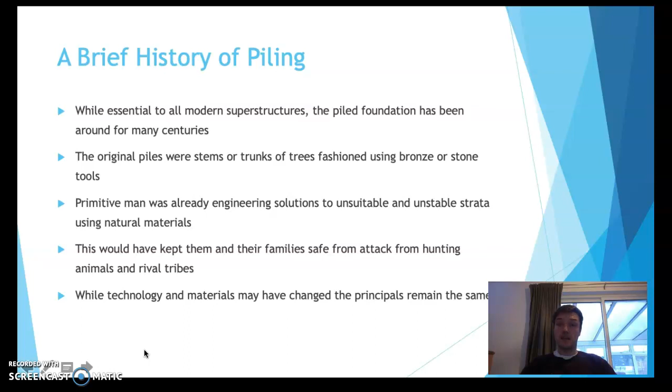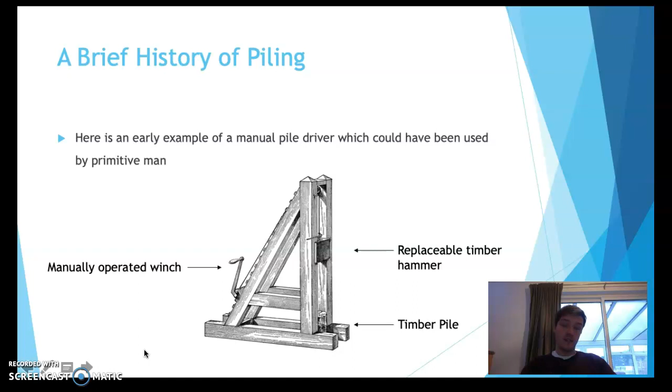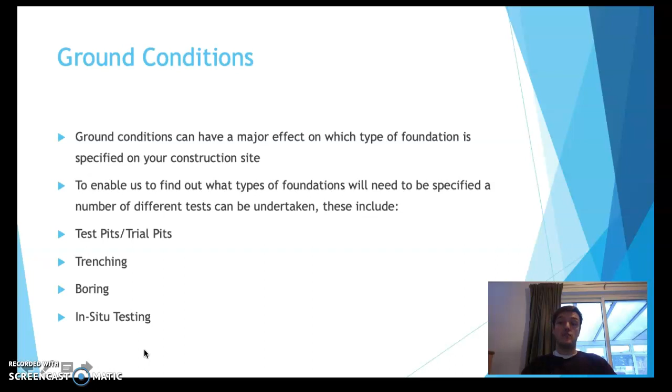Ground conditions will have a major effect on which type of foundation is specified in your construction site, but to enable us to find out what types of foundations will need to be specified, a number of different tests can be undertaken. These include test pits, trenching, boring, and in situ testing.

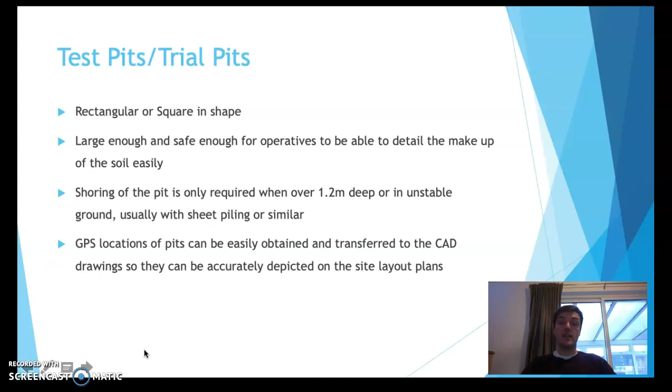Test pits are usually rectangular or square in shape, and large enough and safe enough for the operatives to be able to detail the makeup of the soil from within. Shoring of the pit is only required when the pit reaches a depth of over 1.2 metres or it's in unstable ground, and this is usually done with sheet piling. GPS locations of pits can easily be obtained and transferred to the CAD drawings so they can be accurately depicted on the site layout plans.

Trenching is similar to trial pits, except in trenching the pit is elongated over a longer distance. Elongating the trench allows the engineers to establish how the subsurface conditions can change over various parts of the site in one go. The same principles are applied as the trial pits. Each trench is to be numbered and recorded on site and on a plan so the engineers can establish which areas the data was recorded. Once the engineers have processed the information taken from the trial pits and trenches, they are able to specify the appropriate foundation types.

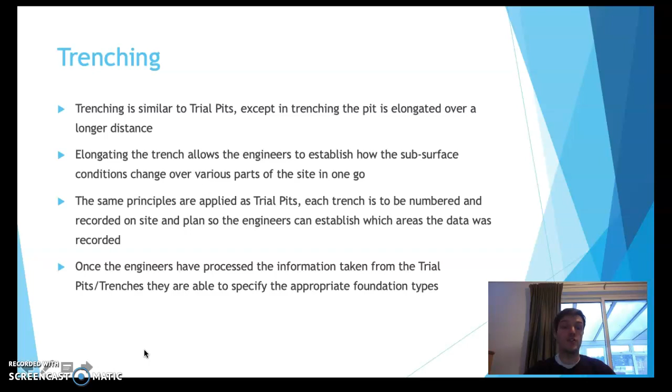Boring provides the opportunity for the engineers to physically remove the soil or rock and take them away for testing, thus enabling them to inspect the soil without major disruption and excavation to the site. With boring, there are many different things that need to be recorded, such as drilling method, drill bit type, run lengths and intervals. Should any of these items not be properly recorded, it could have an effect on the results of the geotechnical investigation. Boring also allows the engineers to establish the water table with greater ease than trial pits, trenching or in situ testing.

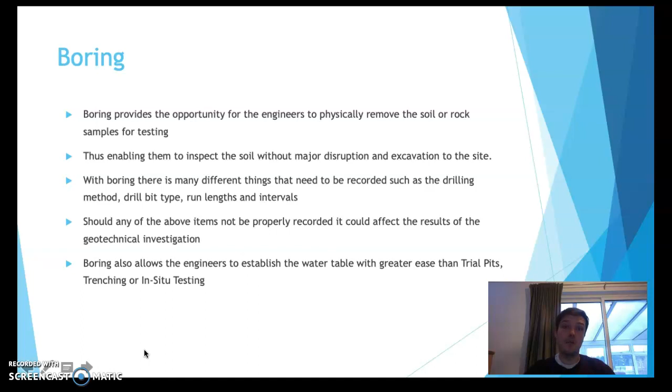In situ testing methods include standard penetration tests, which penetrate via drilling, and cone penetration tests, which penetrate via direct push. These tests can go some way into showing the engineer the relative density of the soil by repeatedly hitting a piece of apparatus with the same amount of force each time. After each blow, the engineer would measure the distance that the apparatus disappears. If the apparatus disappears rapidly, then the makeup of the soil is not very dense.

And likewise, if the apparatus takes a large amount of blows to disappear, then it's very dense.

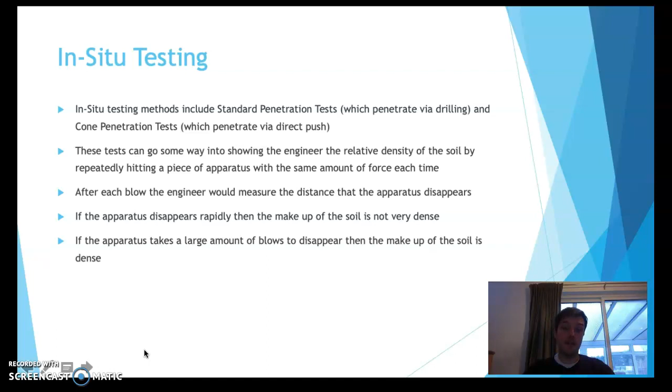Moving on to cast in situ concrete piles. These are prepared by using rig machines on site to core the ground to the desired depths and then mass fill with concrete. Without the use of piling rigs, cast in situ concrete piles would not be able to be specified, as we would not be able to excavate to the required depths. This is another way in which man has used technology to ensure that the best and fastest processes are used on site to get the best end results.

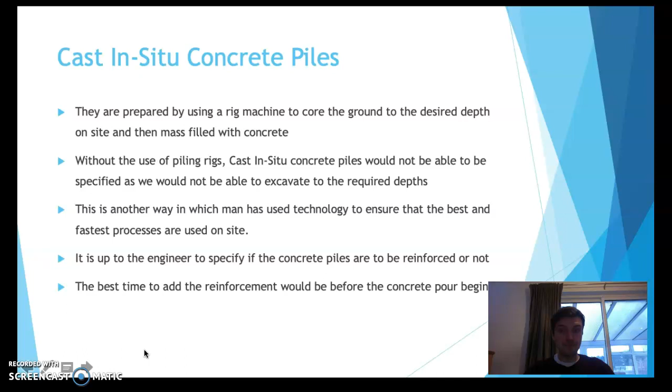It's up to the engineer to specify if the concrete piles are to be reinforced or not. The best time to add this reinforcement would be before the mass pour begins. Inclusion of foreign material within the pile can negatively impact the structural integrity of the pile. One way that foreign material can be included in the pile is via a wall slip, which could create gaps over the length of the pile. We could also reduce the risk of foreign material entering the pile by either fully lining the core or by lining the first 2 to 5 metres of excavations, should this be where the unstable soil is.

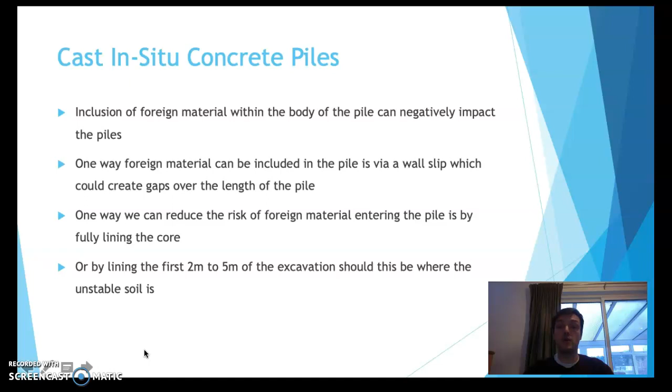Here are some advantages of cast in situ concrete piles. Custom piles of any size or length can be constructed on site. Damage during transportation of precast concrete piles is common, and this eliminates the risk. The lack of vibration from installation plant means that any adjoining structures are safe from damage. They are more suitable to sites where the soil has poor drainage properties, as the process does not significantly impact the soil immediately surrounding the pile.

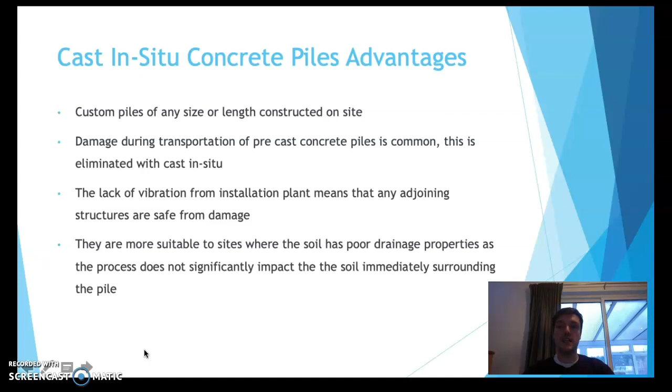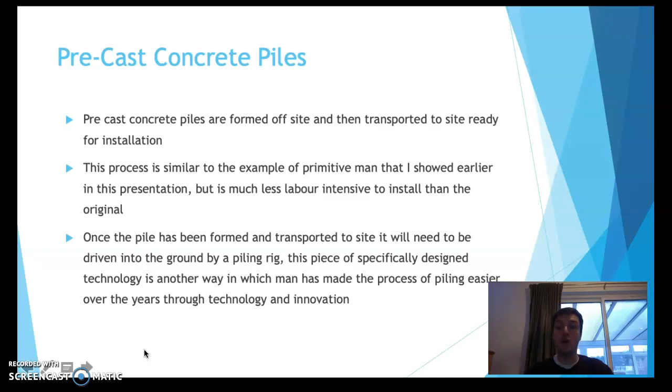Precast concrete piles are piles that are formed off-site and then transported to site ready for installation. The process is similar to the example of primitive man that I showed earlier in this presentation, but is much less labour intensive to install than the original. Once the pile has been formed and transported to site, it needs to be driven into the ground by a piling rig. This is a piece of specifically designed technology and is another way in which man has made the process of piling easier and more beneficial over the years through technology and innovation.

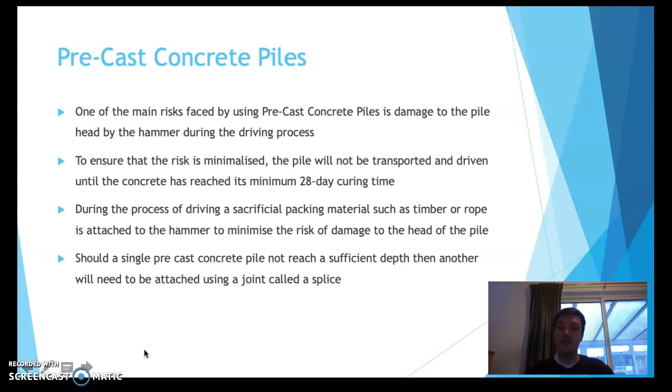One of the main risks faced by precast concrete piles is damage to the pile head during the driving process. To ensure that the risk is minimised, the pile will not be transported and driven until the concrete has reached its minimum 28-day curing time. During the process of driving, a sacrificial piece of packing material such as timber or rope is attached to the hammer to minimise the risk of damage to the head of the pile. Should a single piece of precast concrete pile not reach a sufficient depth, then another will need to be attached using a joint called a splice. And here we can see there are many different splices which can be specified.

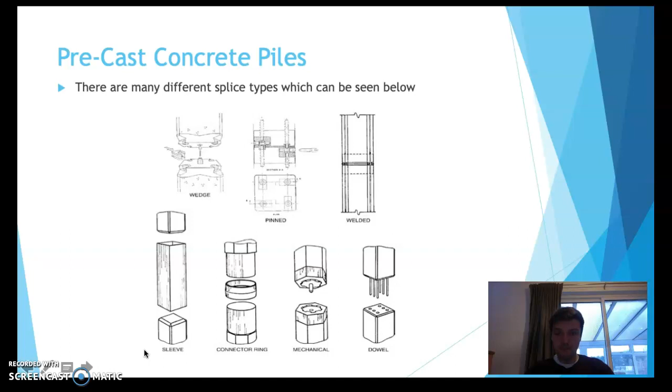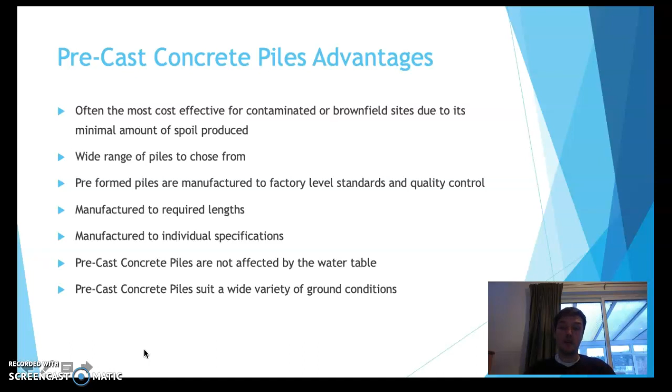Precast concrete pile advantages. They're often the most cost-effective method for contaminated or brownfield sites due to the minimal amount of spoil produced. A wide range of piles can be chosen from. Pre-formed piles are manufactured to factory level standards and quality control. They can be manufactured to their own required lengths and individual specifications, and are not affected by the water table. Precast concrete piles suit a wide variety of ground conditions.